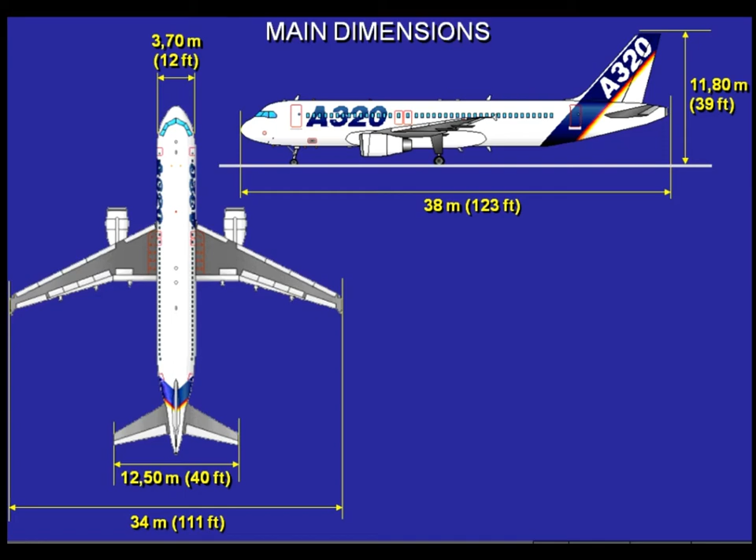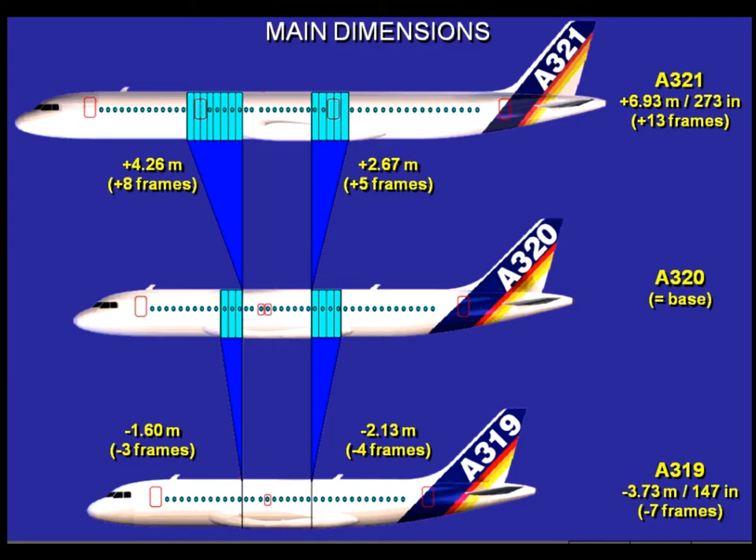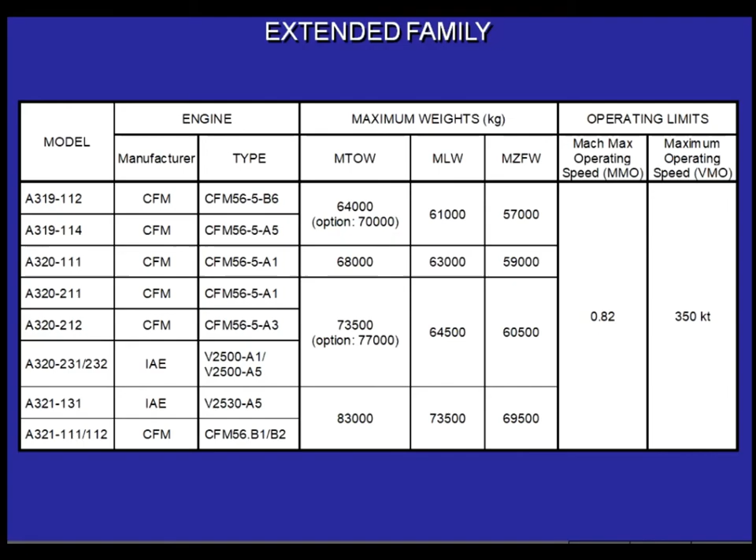Here are the typical two-class layouts for the A320 family. The cabin is equipped with a maximum of 145 seats for the A319, 180 seats for the A320, and 220 seats for the A321.

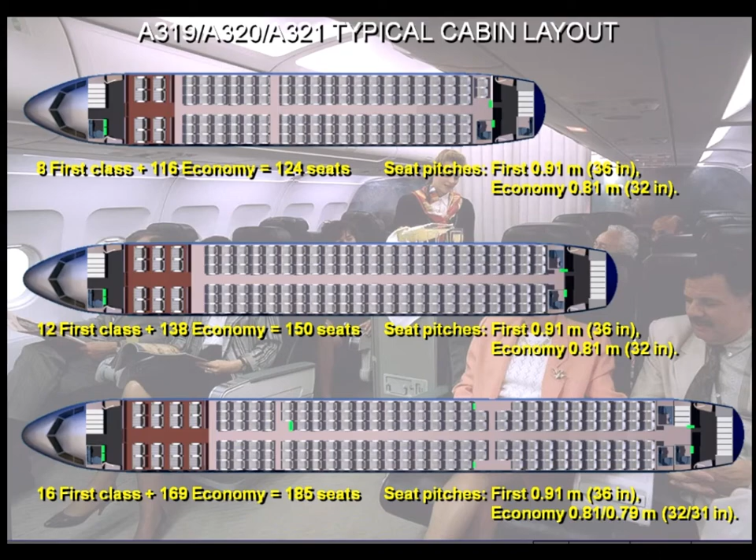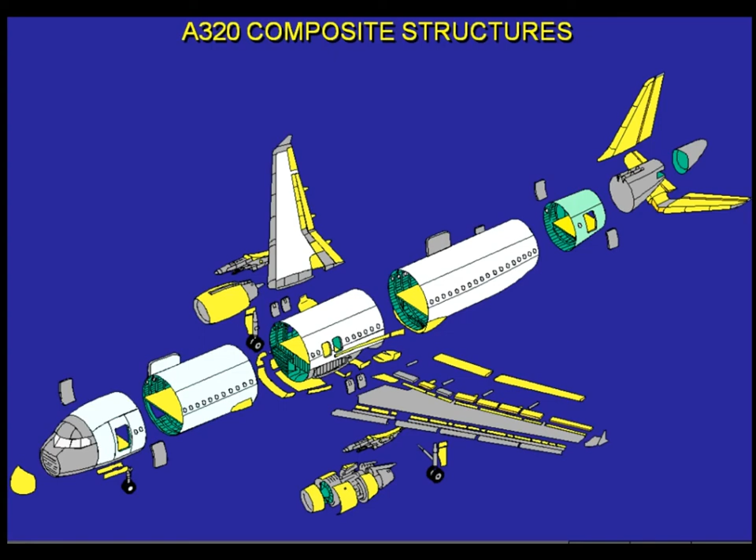The cockpit is equipped with adjustable seats for two crew members, a third occupant seat, and, depending on the configuration, a folding seat for a fourth occupant. Various furnishings and equipment are fitted in the cockpit for the comfort, convenience, and safety of the occupants.

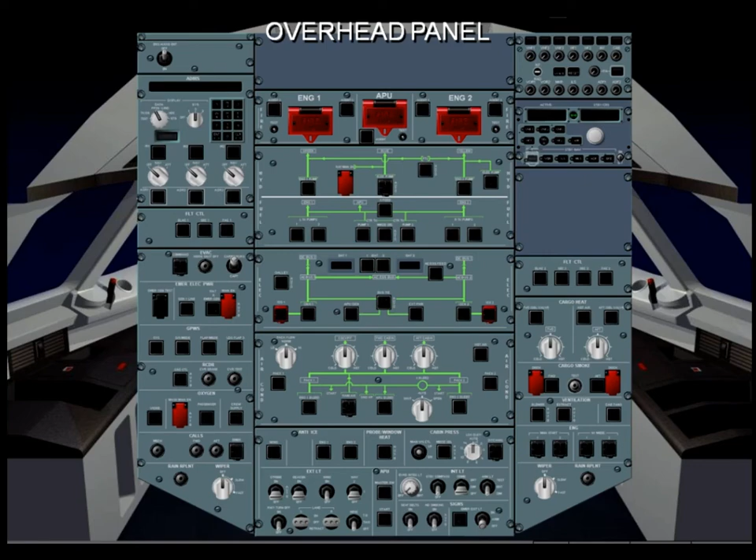The controls of most aircraft systems are located on the overhead panel. The overhead panel is divided into two main sections: a forward section including the system panels, and an aft section mainly comprising the circuit breaker panel.

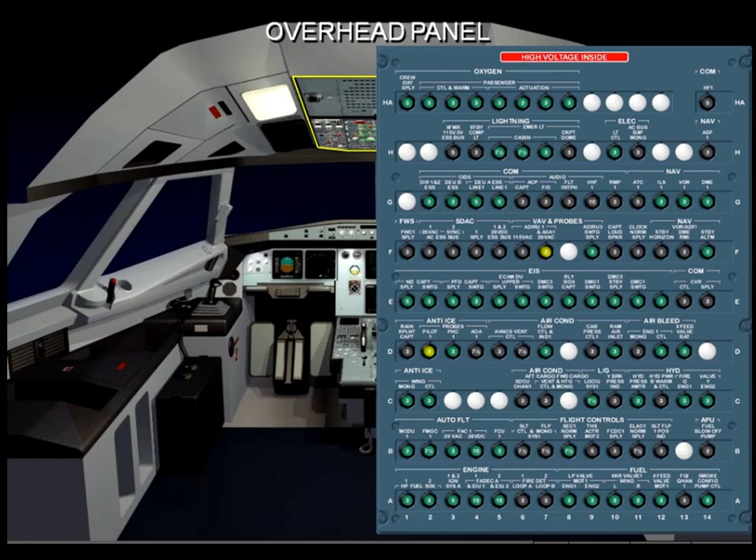The Flight Control Unit, FCU, includes the Electronic Flight Instrument System, EFIS, controls, and is used for control and monitoring of the Auto Flight System, AFS. It is located on the glare shield. The Master Warning and the Master Caution lights are also located on the glare shield.

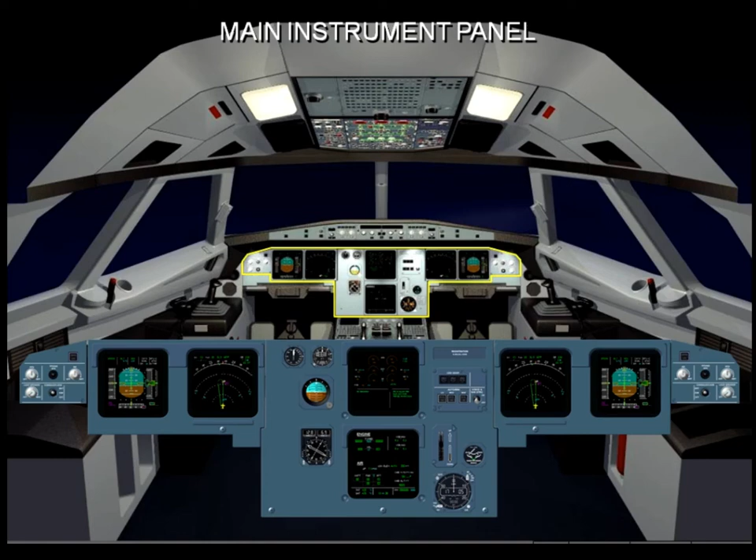Six interchangeable cathode ray tubes are located on the main instrument panel. Two of them are dedicated to the Electronic Centralized Aircraft Monitoring, ECAM. The others are two primary flight displays, PFDs, and two navigation displays, NDs. Standby instruments and landing gear controls are also located on the main instrument panel.

Several control panels are located on the center pedestal as shown on the screen. The main control panels are thrust levers and thrust reverser levers, pitch trim wheels, flaps and slats control, brakes control, MCDUs.

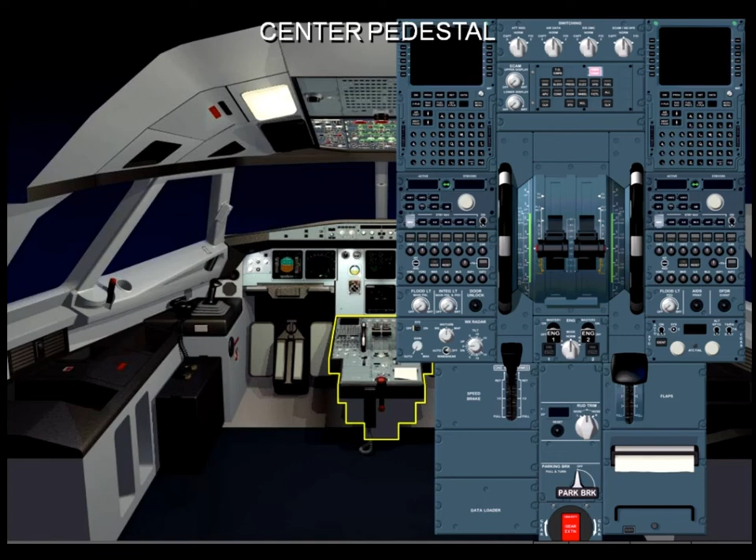The side sticks and nose wheel steering handles are mounted on the side consoles. The side consoles provide documentation stowage, oxygen masks, and communication devices.

In normal operation, no lights are illuminated in the cockpit. This is called the lights out philosophy. Most of the illuminated push buttons have two stable positions, pressed in and released out, each position corresponding to a control signal sent to a system.

Pressed in, recessed: normally used system activation, auto or on. Temporarily used system activation, on. System activated for maintenance operation, on, or override. Released out, flush with the panel: system deactivation, off. Manual activation of a system, on. Activation of an alternate system.

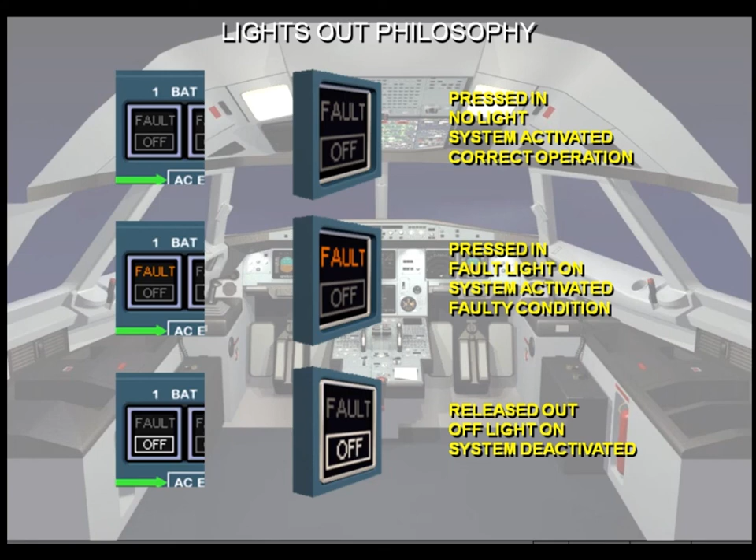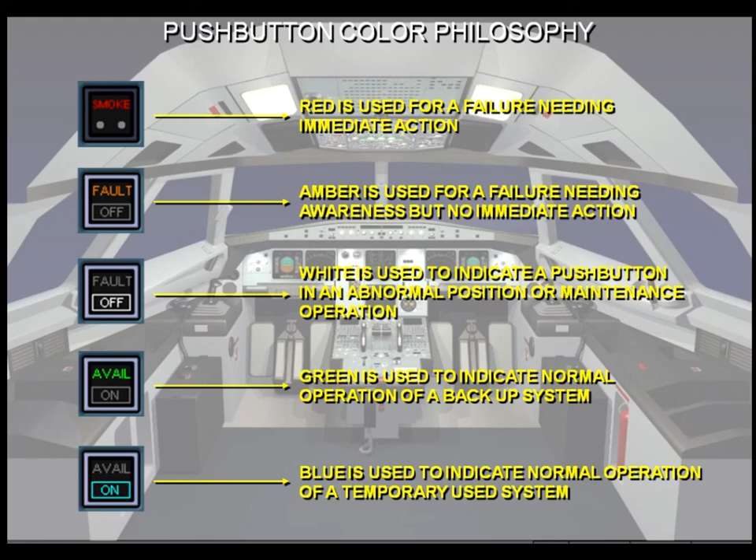Some push buttons have only one stable position, released out. When pushed, they send a control signal to the system. The illuminated push button and annunciator lights are of different colors according to their function. In normal operation, only green lights and sometimes blue lights are illuminated. Illuminated push button and annunciator lights example. Light test configuration.